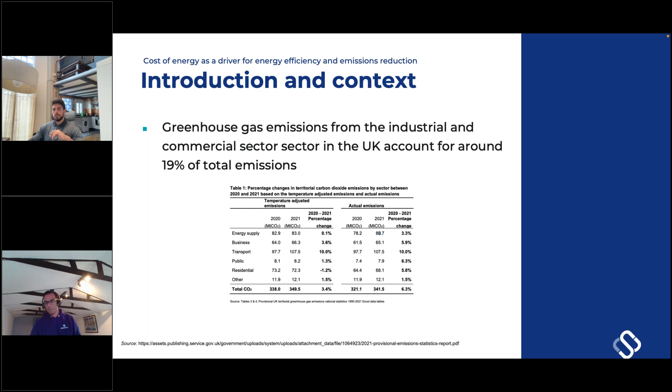29% is the overall energy consumption of the industrial sector within the UK market. And if we look at the impacts on cost of energy, it's been staggering. There's been an 865% increase in the price of electricity from September 2021 to 2022, from £55 per megawatt hour to over £500 per megawatt hour - a huge increase in electrical cost. We've seen the same effects across gas pricing, with another staggering statistic of over 764% increase in the price of gas over the same period, having a huge impact, especially on high intensity energy users such as the industrial sector.

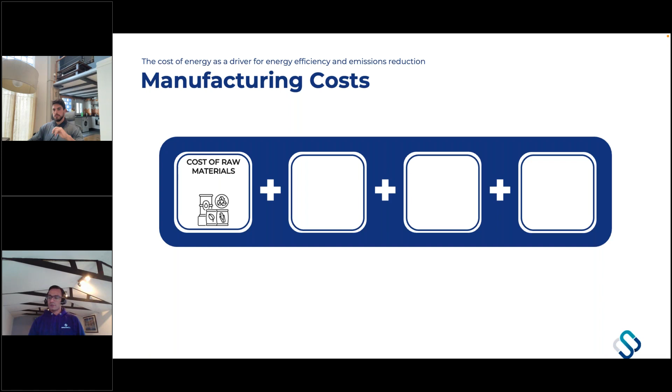So the cost of energy as a driver for efficiency within the manufacturing process is really what organizations we see are having a challenge with today. When you consider that when producing a widget or an output, there is the cost of the raw materials, the direct labor costs, and the indirect manufacturing costs - those types of costs that cannot be directly attributed to a specific line item within the manufacturing process.

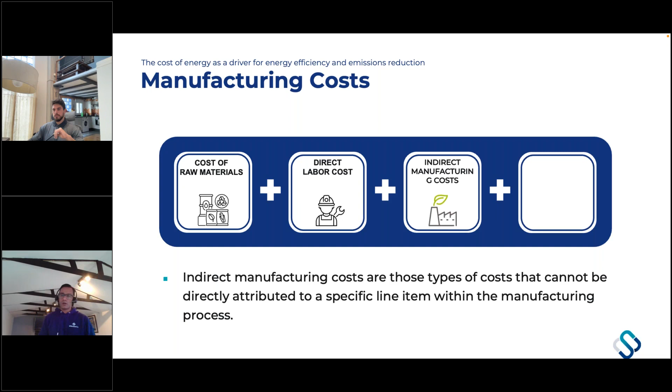For many organizations, understanding that energy impact is essential because energy makes up a large percentage of the cost of the final product. That's really where, through today's session, we'll share with you tools and how Dexma can really help organizations transform the way in which they manage their energy consumption.

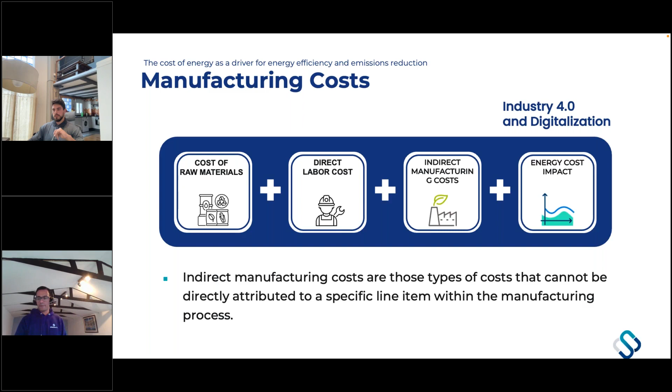But let's dig a bit deeper in terms of that cost attributed to an output. These statistics come from other European countries, but 5.3% is the impact of energy cost on the selling price of a final product within the timber industry, for example. If we look at other sectors such as the chemical industry, 7.2% is the cost of energy impact - not so dissimilar in the paper industry - and the numbers start getting bigger as you get into more industrial environments like the metal industry, as well as construction.

So that increased price, the added pressure of decarbonization, is really what organizations are challenged with. It's through the digitalization and adoption of technologies such as Dexma that we can really help our partners and customers transform the way in which they bring data from their sites and multiple sites around the world.

And Danny's going to now take us through some of those key capabilities that you can expect when going through that digitalization strategy. Danny, over to you. Thank you, Bilal, for the insightful explanation.

I'm going to explain how utilizing digitalization can be a foundation for standardizing and centralized energy management and costing. We start with multi-site management: centralized and uniform management of numerous places, where you can also compare various zones, factories, or production methods. This is a powerful tool for multi-location projects, letting you have a logical structure and indicators by area quickly and efficiently.

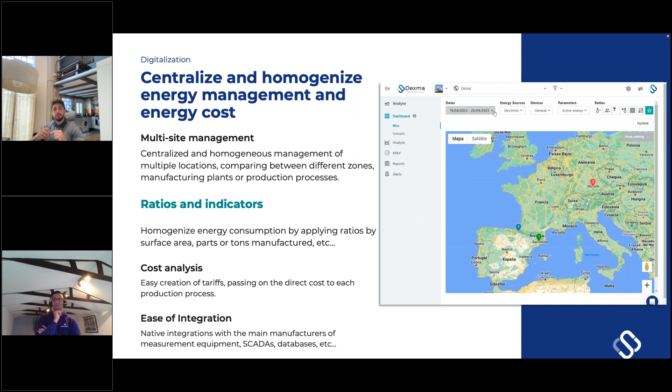Regarding ratios and indicators, we know that ratios are used for analyzing consumption in a detailed way. The platform offers the possibility of creating different types of ratios that can adapt to your different portfolio needs, applying these based on manufactured tons, surface area, or parts to homogenize energy consumption.

It's important to be able to compare your different plants or manufacturing processes, not only to see the consumption, but also the consumption per ton or part produced. Between those plants, you can also see which are the most profitable in production.

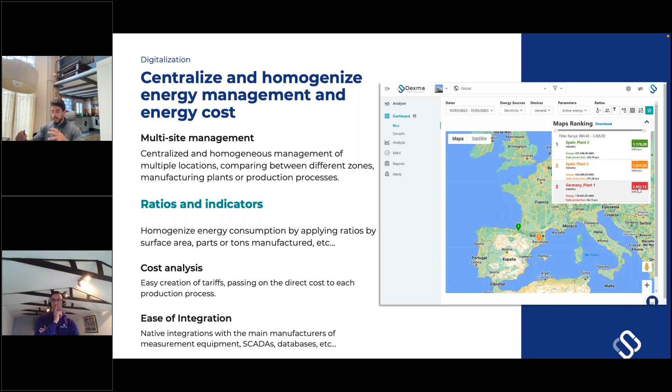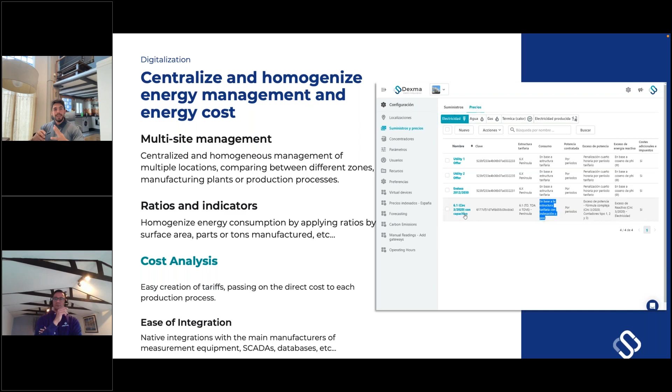Moving on to cost analysis, we have the simplest tariff creation, and also the ability to transfer the direct cost to each stage of production—so overall, being able to see how much it costs you to manufacture a piece, and help you understand how much money it's going to cost to manufacture that specific piece.

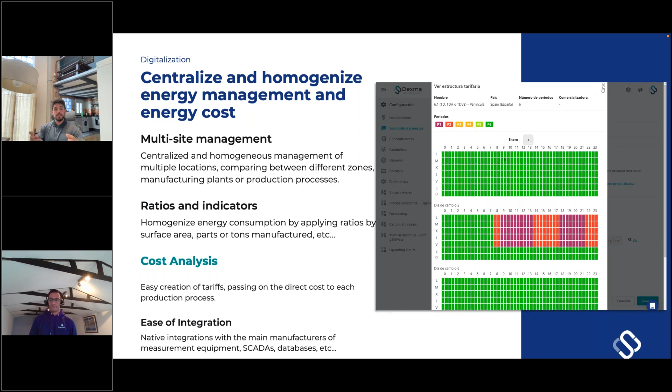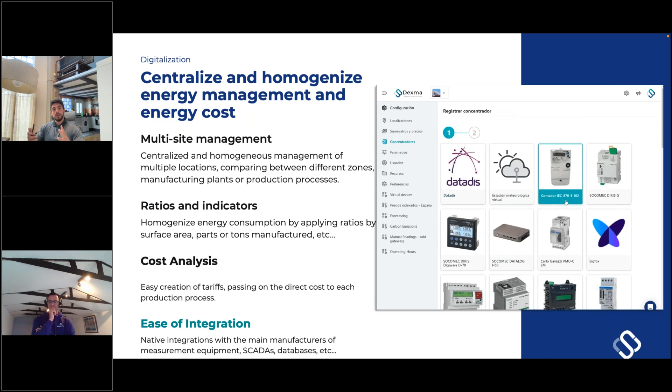Last but not least, we have the ease of integration. It has never been that easy to send data onto a platform solution. We have native integrations to the leading measurement devices, such as SCADAs, databases, etc. You can also send data to the platform via API, FTP, CSV, etc.—it has never been that easy to send data onto a platform.

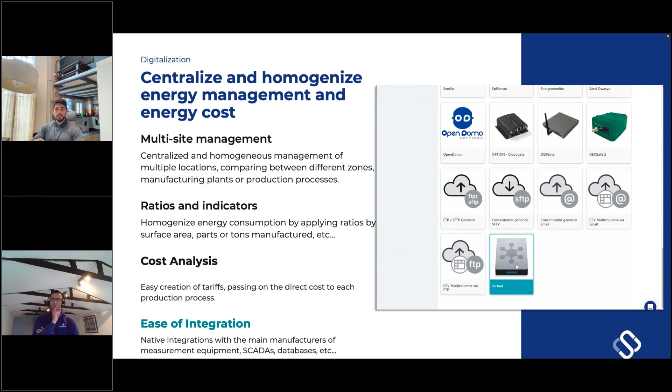You make it sound that easy, Danny, because it is a big complex topic, right? No two buildings are the same, and when you have to bring in data from multiple sources and different systems, Dexma provides that ease of integration.

When you're able to bring data from multiple sites and different siloed systems, you can then start that multi-site management strategy, looking at your portfolio as a whole, breaking down and analyzing exactly how buildings are performing at a site or production line level, and then focusing on cost and identifying energy efficiency measures.

We're going to now talk a little bit about a day in the life of a sustainability and plant director, and I'd like to introduce you to Olivia. Olivia needs information and insight—she has a lot of data across her portfolio, but she needs more insights, and she needs those insights to really help her get focused on reducing energy costs. So she's implemented an energy management system, such as Dexma, to help her understand her energy consumption, costs, and carbon monitoring.

Thank you, Bilal, again for the introduction. So let's take a look at the consumption and indicators. Of course, we have different indicators, but the ones really focused in the industry sector are active energy and reactive energy. We also have kilowatt-hour per units produced, and several customized indicators based on the KPIs or targets that the specific building or industry business wants to achieve.

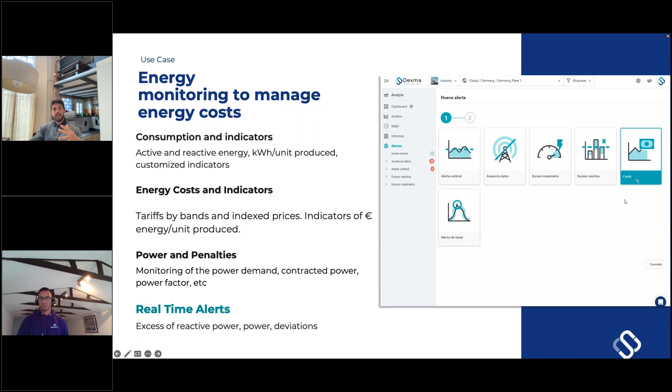Moving forward, we have the real-time alerts, where you're able to access the excess of reactive power, power deviations, etc. Olivia is going to be able to access and have at her reach a dashboard with the critical information she needs.

All these dashboards can be shared with different stakeholders within the same building, industry, or company through a private URL. They will only be able to access this private URL and not the rest of the software, so no confusion is created. It has never been this easy to share insights or KPIs with stakeholders. The dashboards allow her to centralize critical information at the level of different multidisciplinary teams that feed on this information to monitor and act whenever necessary.

These dashboards have allowed Olivia to finally have the information she needed in order to make different improvements focused on competitiveness.

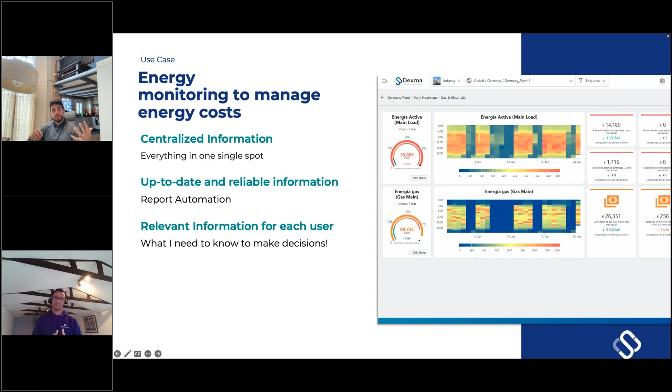Thanks, Danny. That journey of bringing all that data together, and Olivia being able to really analyze and capture those insights across the portfolio and production sites, has given her the ability to move from being reactive to proactive. With the alerts and various reports and analytics screens, she's been able to really get under the skin of where those opportunities are. With the dashboard capabilities, being able to share that and create dashboards for different stakeholders with a single source of truth of data is essential, because then she's been able to really identify some huge energy saving opportunities.

After implementing this energy management platform, Olivia has now been able to identify potential projects, and measuring the impact in cost and carbon reduction of these investments is really important. Many organizations have invested in technologies and not tracked the performance of those, not realizing whether they're meeting return on investment objectives or performing as intended.

Within the Dexma platform, we have that capability of measurement and verification. Olivia is now able to ensure that the funded project to put solar on the roof is performing well - what they're importing, what they're exporting, and how much self-consumption they're actually able to achieve, because the more of that energy they can self-consume, the less they have to rely on grid energy.

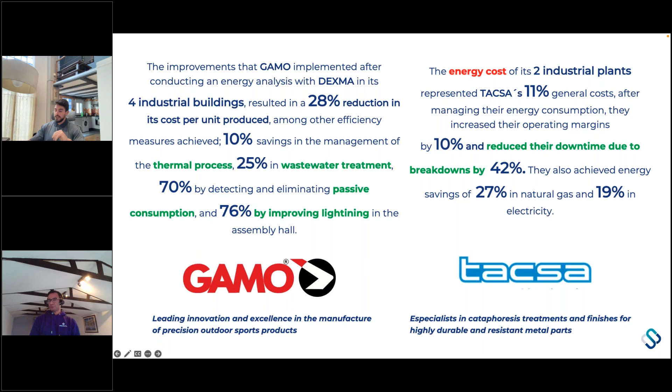So a nice summary and conclusion after this magnificent webinar. Thanks, Danny. Some hugely impressive results from 2 great examples of organizations in the industrial sector, very different organizations producing very different things, but clearly, as Danny described, some huge opportunities for them to make significant savings and well on the way toward that net zero objective they have as an organization.

To conclude, I guess the point is the cost of energy has driven and accelerated the adoption of energy efficiency projects and investments within the industrial sector. From the examples and successes we've shared with you, companies that follow the path of centralizing their data from multiple sources across production facilities in multiple locations can really start to benefit from the energy management capabilities that systems like Dexma can provide.

Really helping to get and identify insights where opportunities for energy efficiency are, and then be able to tackle those by tracking the efficiency and decarbonization projects with the right tools, by sharing that information and making it freely available through reports and dashboards and various other means. You're able to break down those silos within an organization to make those strategic investment decisions.

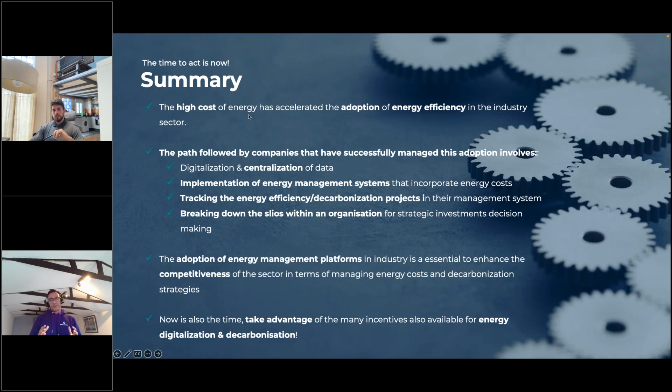And as Danny described, there are funding mechanisms now available globally through central government. The ones we've shared with you are more recent ones from the UK and Ireland. But again, there are many government-funded initiatives to really help the industrial sector make those initial investments from a decarbonization perspective.